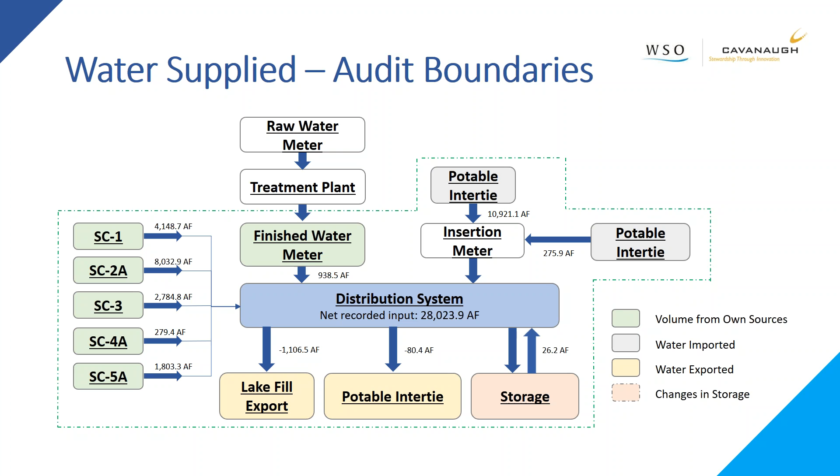Another valuable component of the water audit when it comes to the volume of supply is how we consider the accuracy of your instruments as contributing to the volume of supply that hits the distribution system. If a meter registers 100 units but is inaccurate, we'll have to adjust the 100 units that it measured for its inaccuracy. The question then becomes, how do we diagnose inaccuracy?

Well, it depends on what type of meter we're talking about and whether we can test it volumetrically or whether we can calibrate it by taking a look at its electronics, and then how we consider data management on top of that meter, whether with a SCADA system or some other method of data collection.

We will distinguish in our conversations this spring between volumetric testing of a source meter and calibration of a source meter. Volumetric testing attends to the accuracy of the actual measurement element itself, where we pass a volume of water through the meter and take a look at how accurate the meter's registration was. So for example, we might draw a volume from a tank, determine how much that volume is with the tank's dimensions, and then compare it to the totalizer read on our meter.

That's a distinct activity from an electronic calibration, where there's no water actually involved in the process. Instead, we work with electronics and, for example, a 4 to 20 milliamp signal to make sure that the electronics are converting it appropriately, given how it's scaled.

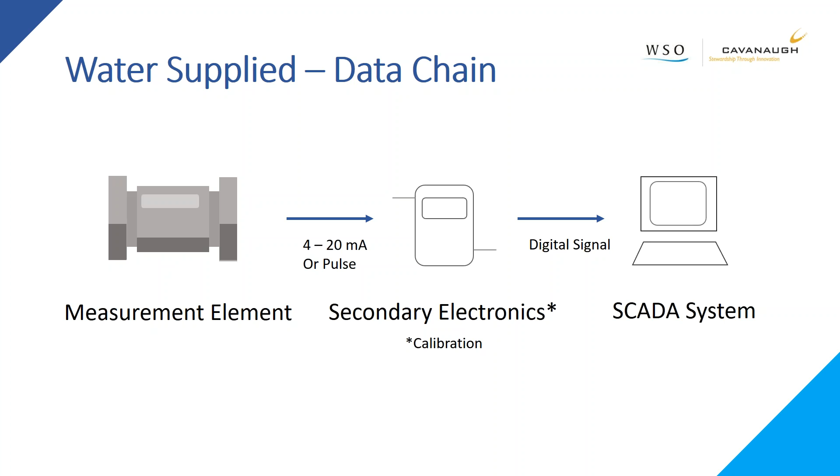If we are able to assess source meter inaccuracy and adjust for it in the water audit, that can of course change our understanding of leakage at the end of it.

So our understanding of supply meter accuracy, when it trickles all the way down through the distribution system, can consequently affect our insight into leakage.

This is a top-down tool where we're going to be assessing volumes of supply and volumes of sales and volumes of authorized use to then get to water loss. So we've got to make sure our fundamentals, our foundation of supply, is accurate.

There are a few different ways to test source meters, and we can talk about the configurations you have available if volumetric testing is of interest, whether that's with a comparative meter or using a nearby tank or reservoir. Those are all options.

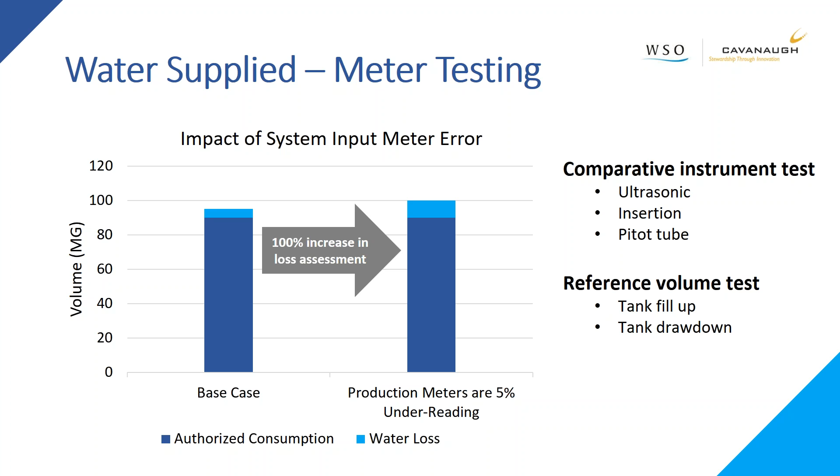Once we've understood our volume of supply by accounting for what we ourselves produce, what we might import from a neighboring agency, and then subtracting what we export in a wholesale fashion to the neighbors, we can move into the world of authorized consumption. And this is water that goes to a legitimate and approved purpose, whether or not it is billed, whether or not it is metered.

Most folks, of course, will see that the majority of their authorized consumption is in the form of billed and metered sales to standard customers like single-family homes, commercial businesses, perhaps some civic institutions. That might all be considered billed, metered consumption. Or if you still have a few accounts that are unmetered, billed, unmetered consumption.

We've also got legitimate volumes of use that aren't billed and don't generate revenue. Oftentimes this is internal agency use, so this could be in your own office building, or it could be for firefighting purposes or infrastructure maintenance. Those are still legitimate uses that we'll want to acknowledge as a form of authorized consumption.

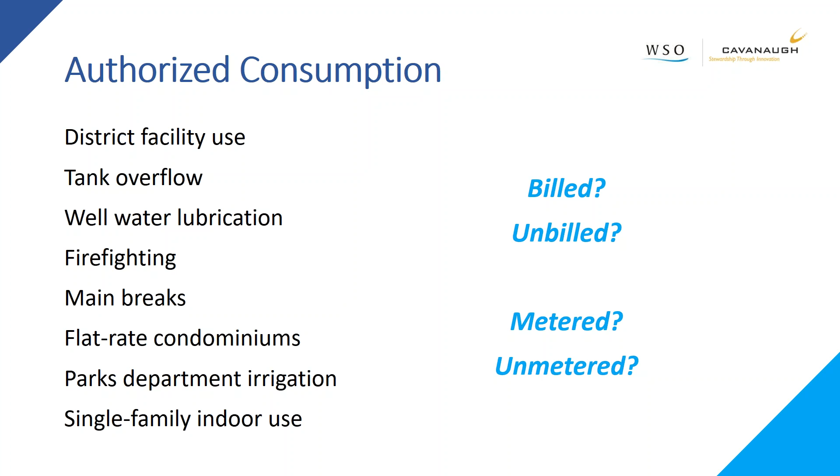So when coming up with your census of authorized consumption, ask yourself: is it billed or unbilled, metered or unmetered? We'll spend a lot of time digging specifically into your volume of billed and metered sales, since it tends to be quite significant and actually account for the majority of the water you supply.

In assessing consumption that is billed and metered, we recognize billing data management is a big job. We'll want to understand how we can work with your billing system to capture specifically 12 months of use, given your billing frequency, and how you might capture adjustments and fix zero reads or failed reads. All of those things have to end up in our one summary number in the audit, and we'll do our best to document any cases where we're making manual adjustments or dealing with the inherent idiosyncrasies of billing platforms. We do have an option to work in depth with you on extracting, analyzing, and validating your billing data, which we'll talk about at the end of this webinar.

Once you've assessed your volume of supply and your volume of authorized consumption, it's easy enough to subtract consumption from supply and end up with an estimate of water loss. But once we have an understanding of the total volume of water loss, we still don't have enough information to actually intervene. We don't know where the water loss is happening and what form it's taking.

Customer metering inaccuracy, for example, is a very different problem from leakage. And if much of your water loss is in the form of delivered water that you didn't register, doing a proactive leak survey isn't going to remedy that issue. So we want to be more precise in our breakdown of water loss, so that once you diagnose the issue, you can apply the right treatment.

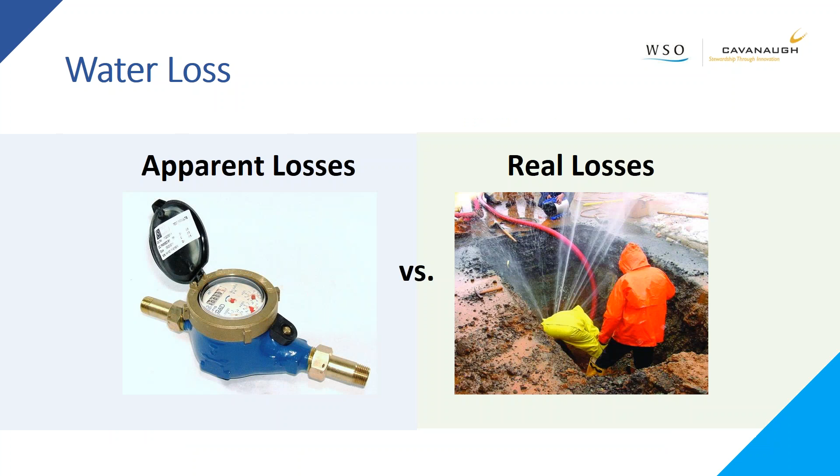In this process of top-down deduction, once we have the total volume of water loss, we then move to apparent losses before arriving at leakage. In the apparent loss category, we've got three different volumes to consider. The first is unauthorized consumption, or theft.

This is water that someone intentionally bypasses your ability to register or bill, and so we often have to guess at this volume. It's hard to track down, but if you do have records of theft, we'll certainly be able to consider those.

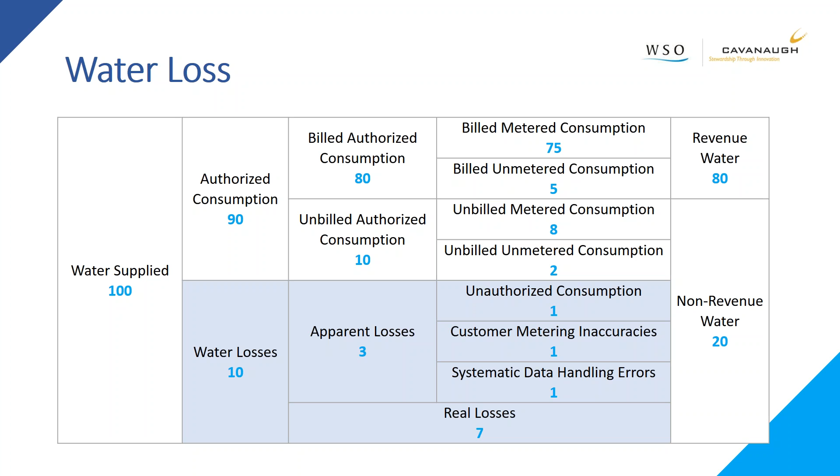There's also the arena of customer metering inaccuracy, where we acknowledge that customer meters tend to under-register, and that their under-registration tends to worsen with use. So the question becomes: what's the aggregate or bulk accuracy of your customer meter stock? Are they 99% accurate, 95% accurate? And given their inaccuracy, what's the consequence for your apparent loss volume?

That's another area where we often find ourselves dealing with incomplete information, and we'll do our best with what we've got. Things like the demographics of your meter stock, how old your meters are, what sizes they are and how you chose to size them, any maintenance you've done on particularly large meters—that will all be relevant here, as will customer meter test results. If you've ever done a volumetric test of customer meters, whether small meters on a test bench or large meters tested in place, we'll want to collect that information and figure out how we can extrapolate it to all of your meters, and if we can, what that looks like.

And then lastly, in the apparent loss world, we've got the volume of apparent loss due to data handling errors. For example, if you have an errant billing program that drops a certain account in the second half of the year, we might consider that to be apparent loss due to data handling error, where you did deliver the water, but you don't have record of its use because of a billing platform issue. We'll want to consider those things.

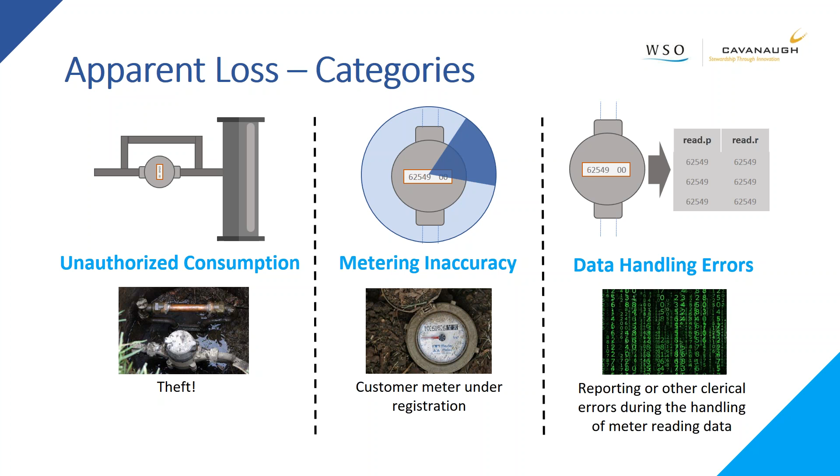Again, we may be dealing with incomplete information, but that's not an impediment. We're looking for whatever information is available, with then the job of documenting what we don't have. Most folks will experience the majority of their apparent losses due to customer metering inaccuracy, and it tends to be consequential for your revenue, since this is water that's valued at your retail rate. We distinguish between your commodity charge that you charge to customers and your service charge or your flat monthly charge, however it is that you bill it, in our valuation of apparent losses.

So when you're thinking about what your apparent losses are worth to you, so that you can then decide what you might want to do about them, what we consider is your variable, or commodity, or volumetric charge. You'll see in this instance, for example, we've got a customer meter that's 90% accurate on the left. That customer is billed $20 a month for a connection. That's a flat charge, and it doesn't depend on the meter's accuracy, so that won't change if we change the meter. But their variable charge, $3 per 100 cubic feet, does depend on the accuracy, in that with inaccuracy, we lose money at that variable rate. So if we were to replace the meter and assume we're installing a more accurate one, we'll increase our revenue at that variable rate.

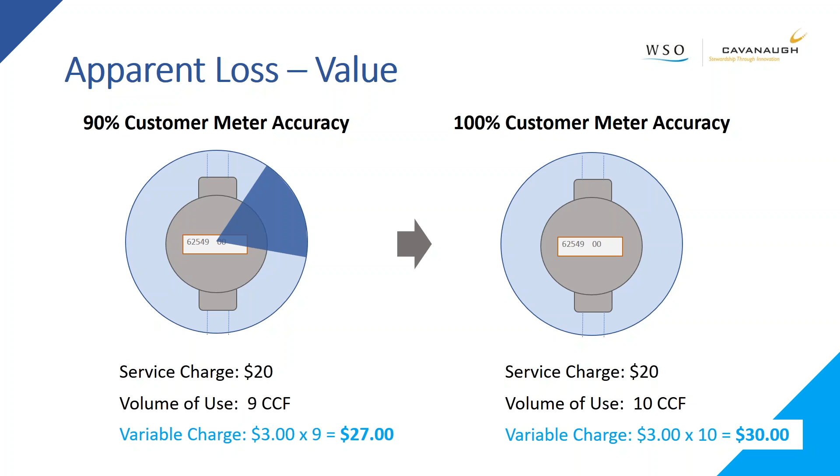So when we start to talk about water loss control, when we speak about apparent loss control, we're comparing the value of water at your retail rate to things like improved meter accuracy, and what it might cost to update your metering stock.

And then in one more fell swoop of deduction, we arrive at our understanding of leakage. So to back us up, we started with a volume of supply. We then deducted our authorized consumption, whether billed or unbilled, and metered or unmetered. And then we deducted our apparent loss estimate to arrive, lastly, at leakage.

But not all leakage is the same. Some leakage is incredibly consequential, and maybe you find it, it's short-lived. Other leakage is small, insidious seeps and drips that go on for years, but that are difficult to diagnose and remedy. So the water audit doesn't attend to the different types of leakage. It just ultimately ends with a total volume estimate of leakage. But in this pilot program, we do have the opportunity to dig deeper into your leakage volume with another analysis, a component analysis of real loss, depending on the availability of data.

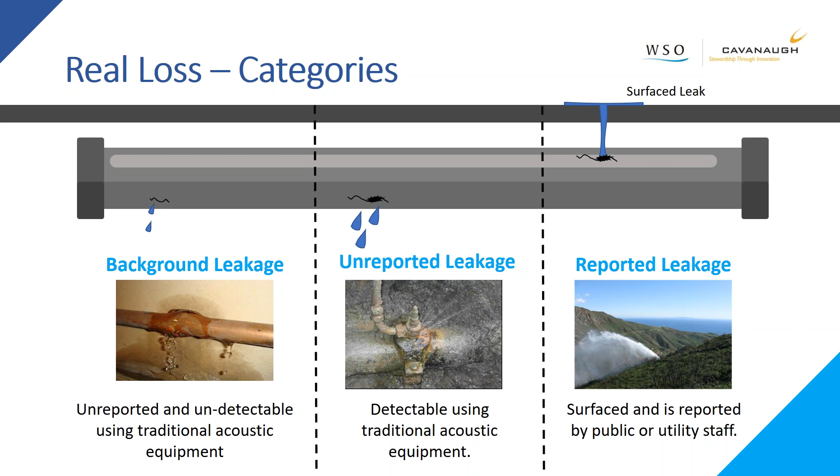So do know that when we talk about water loss control in the leakage realm, leakage control, we use different strategies for different types of leakage. Leak detection, acoustic leak detection, will only find leaks that generate enough noise to be heard, whereas something like pressure modulation or pressure reduction can reduce seeps and drips throughout the system. So the game here is going to be diagnosis of the type of leakage you're experiencing, so that we can then, again, apply the correct remedy.

Typically, folks will value their leakage at production cost. This is distinct from apparent losses, which tend to be valued at retail rate. Real loss tends to be valued at however much it costs you to acquire the water, treat the water, and then distribute it, with power, pumping charges, that sort of thing. If you're in a supply-limited context, maybe your leakage is worth more to you. Maybe you would turn around and sell it, so we could value it at retail rate. The value of your leakage is a conversation we'll have in person when we get together for a workshop this spring. But do know that you'll have to come up with inventories of treatment costs, chemical costs, pumping electricity, those sorts of things for the water audit.

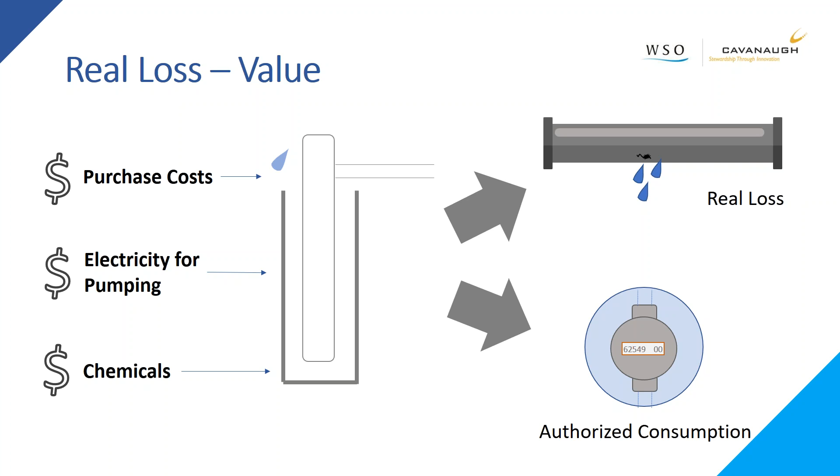The last thing that the water audit does that I'll touch on before passing over to Will Jernigan again for more conversation about the specific water audit software tool is that the water audit ends up producing a suite of performance indicators that are best viewed as a suite in concert rather than as any one indicator.

One of the helpful things we consider in performance indicators is what leakage for your system is going to be unavoidable. Zero leakage is never the goal, since that's impossible to achieve. Instead, a more useful point of reference is the leakage that, given your pipes and your pressure, we would consider to be the cost of doing business and kind of untouchable. We refer to that by the term unavoidable annual real loss, and that volume is system dependent.

So you'll report on how many miles of mains you have, how many service connections you have, what pressure you operate, for us to be able to model the volume of leakage that in any given 12-month period would be unavoidable for your system. We can then compare what we estimate you actually leaked to appreciate the opportunity out there for leakage reduction.

Then on top of that, the goal will be to add a layer of cost benefit and understand just because leakage is technically recoverable, does that mean it's also cost effectively recoverable? We want to make sure that our actions here provide some return on investment, and the water audit will start us down that path.

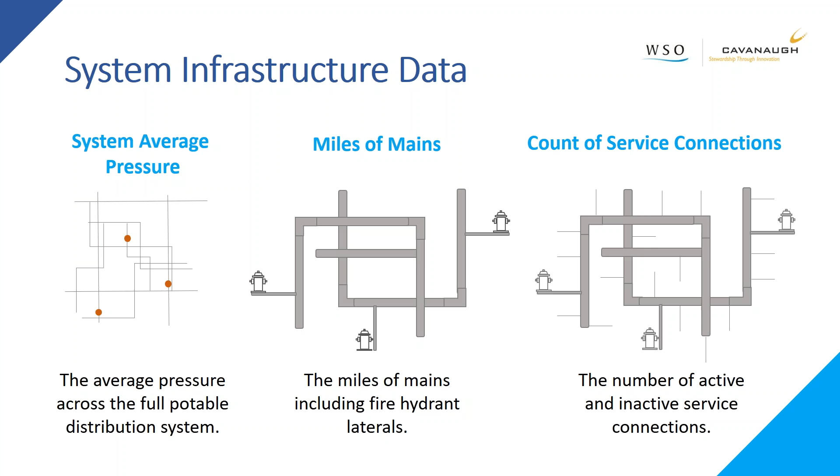And then lastly, because water loss management is inherently an economic question, we need a few cost parameters to get us started. The water audit software will request your total annual operating cost, which is meant to be all-inclusive. Basically, every dollar you have to spend in a year to keep the system alive for future years and to keep water flowing through the pipes. A lot of folks will include, for example, their capital budget in this total annual operating cost.

It's not strictly O&M. We also need some sense of your customer retail cost, that commodity or that variable charge that you bill to your customers. Typically, this is a weighted average if you have multiple tiers or different classes, where we take all of the commodity revenue that you received in a year and divide it by the volume you sold. That will inherently weight any tiers or classes that you have.

That will be used to value your apparent losses, water that you delivered but were unable to bill for. And then lastly, we need some understanding of how much you have to invest in producing a unit of water in a variable sense. So this is the cost of acquisition, whether that's a per acre foot or per million gallons groundwater extraction fee, or a per acre foot or per million gallons purchase fee from a neighboring agency.

And then any treatment costs, for example, how much you might have spent on chlorine or treatment power. And then distribution costs, how much you spent on pumping electricity, pumping power, that sort of thing. These costs need to be variable in nature, where they will change depending on the volume of water you produce.

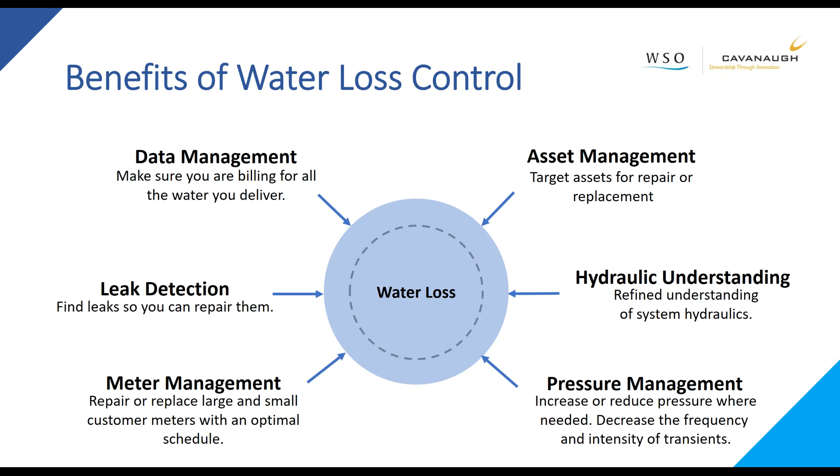Let's take a quick peek at what data we're going to ask you to provide to us. In a moment, I'm going to show you the program website, because we developed it with the intent that everything you need in terms of resources, or if you have questions, is usually on the website. That can save the step of having to reach out and send an email—all these things centrally located.

We are asking for the data to be provided by February 12th, so early February. The data will apply to calendar year 2016. Obviously we're not done with calendar year 2017, and in most cases there's a necessary period after the year's closed out to really get a lot of the data that you need. So in practical terms, we're going to use calendar year 2016 as the benchmark year for the period of data we request.

In general, Excel is better than PDF. If PDF is all you have, that's okay. The overall caveat I'd put on this is if we ask you for something and you don't have it, or you have something close but not exactly what we're asking for, don't worry. Just do your best, provide it to us, and we will work with you, meet you where you are. I really encourage you to do your best and don't sweat it too much. As always, reach out to us if you have questions.

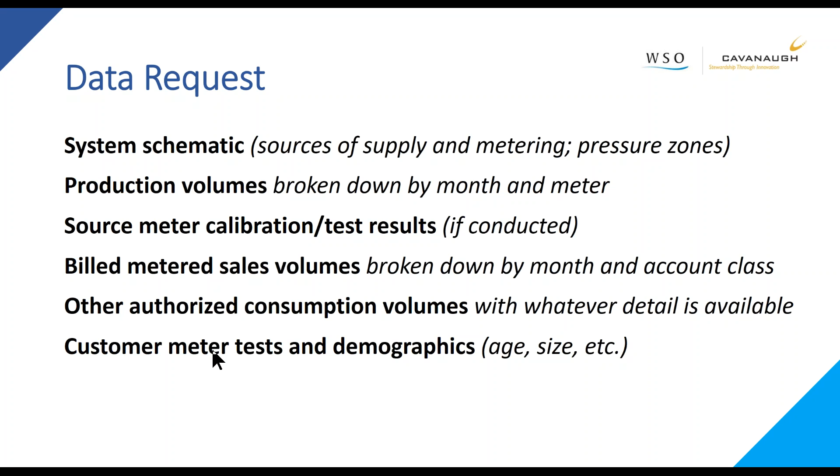Anything else you've got on authorized consumption? If you keep flushing sheets, other estimated uses, communications with fire departments, anything and everything like that, we'd love to see it. So provide that, and meter testing data on your customer meter if you are doing any. If you're not doing any, that's okay too. Don't worry about it. But we would be interested in learning about some of the demographics as much as you can provide. It's helpful.

Lastly, on the data front, Lucy touched on these physical parameters: miles of mains, count of connections, both inactive and active. Key point there, connections, we're looking for physical service lines in the ground, so not necessarily looking for count of meters or count of customers per se, but actual service connections, physical service connections.

Operating pressure, operating cost, retail unit cost with supporting calculation, and variable production cost with supporting calculation. Now, this is another one where if you're struggling with how to do the calculation or just not sure, that's okay. You can either reach out to us beforehand, and we're happy to talk with you about it, or just do the best you can, provide us the calculation, and then we have something to work from as we are reviewing, and then when we're physically together in the March workshop. So again, we're very accommodating, open arms here. Be very comfortable and forthcoming in the data that you provide.

As I mentioned, the resources page has the written data request to download. All right, so everything I just went through is the base level information. We're asking that of everyone, all 10 utilities in the program.

In addition to that, we have what I'm going to call an extra credit assignment. That means you don't have to do this, but if you are willing and able to provide us above and beyond the base level data request, then we are offering to perform some advanced analysis on that data, on more raw type data. I'll touch on this very briefly, but we're basically going to be providing another one-pager that describes the type of data and maybe the formats that we would like to see it in. Again, this is totally optional, but whatever you put in, the more you put in, the more you get out.

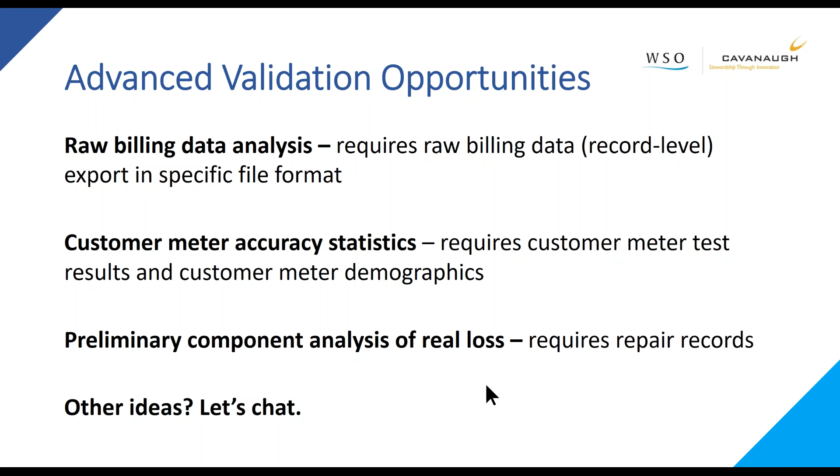All right, with that, where do we go from here? Next steps: gather your supporting documentation, compile your water audit. I'd say first, go to the website, check it out, download the guidance doc on this, what to get, then gather that information, compile the water audit, upload the information to us. Around that February 12th deadline, when you upload the information to us, is when we're going to provide you with a brief practices survey and get just a couple of operational points from you on what's happening in your system, and then mark your calendar for joining us in person in a workshop coming to a city near you in early March. So with that, looks like we got about 10 minutes left in our allotted time.

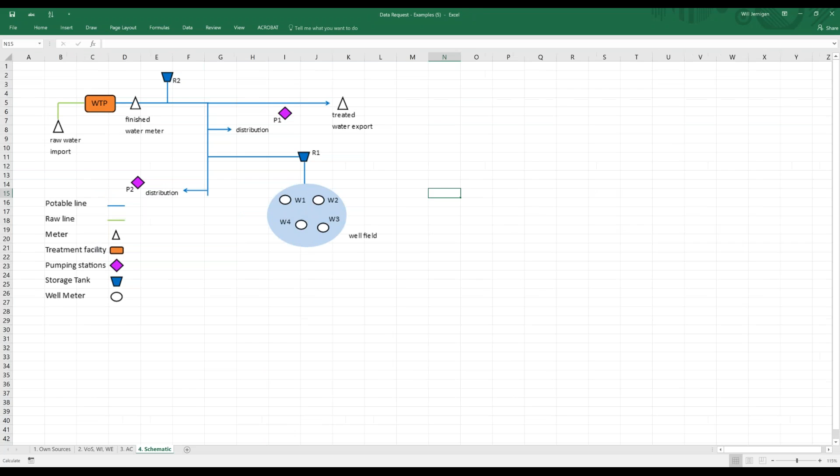Absolutely, we can deal with complexity and complication. From the system schematic, we want to pull a few pieces of information. It's helpful if we have source meters in that schematic, whether they're already part of it or you just draw a dot on paper and scan it. We'll also be curious about pressure zones, just to inform conversation. We don't need hydraulic gradients, just an understanding of how multiple zones relate, which might be large or small, whether you're pumping uphill or dropping pressure from a tank.

Will's pulling up an example schematic here where it's really kind of like a kindergarten drawing. We don't need it to scale or built in AutoCAD, just some sense of which direction the water flows, where your meters are, and how they relate to sources of supply. Generally, folks find it's best to get a piece of paper, draw it, label it, and send it our way. If that's challenging, we can work with whatever schematics you have on file from previous work, but simple is usually better than complicated with a lot of information.

Will, I don't know if you have anything to add, but that's where I'd start. Yeah, I think that's good. This is very simplistic, the one I'm showing on screen, and John, your system being large and complicated, this back-of-the-envelope sketch may or may not be practical. But I'd key in on thinking about, as you're delineating the boundary of your water audit, where does potable water enter, and in some cases if there's an export point where it leaves the system. That's important to identify, especially if you have multiple points of metering around the source, like in the example Lucy used.

And if there's an upstream meter, maybe the raw meter at the treatment plant, and then a finished water meter that's known to be questionable, it may make sense in the short term to look back to the raw meter instead. Things like that, just having it sketched out, helps facilitate the conversation. So do the best you can, and as always, feel free to send us something in the meantime and ask if it's what you're thinking. We can give you feedback along the way.